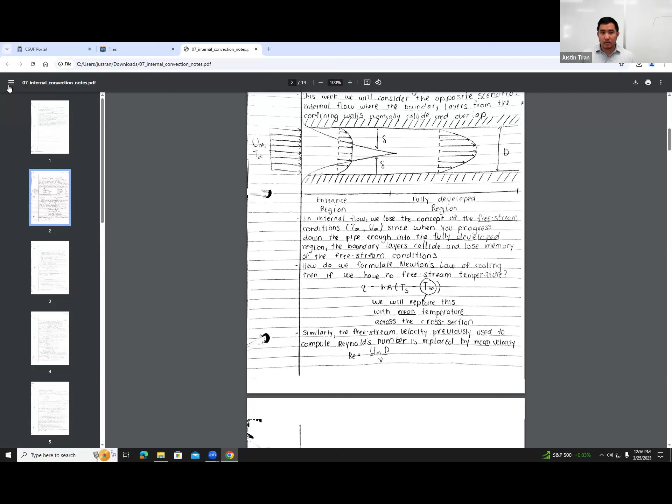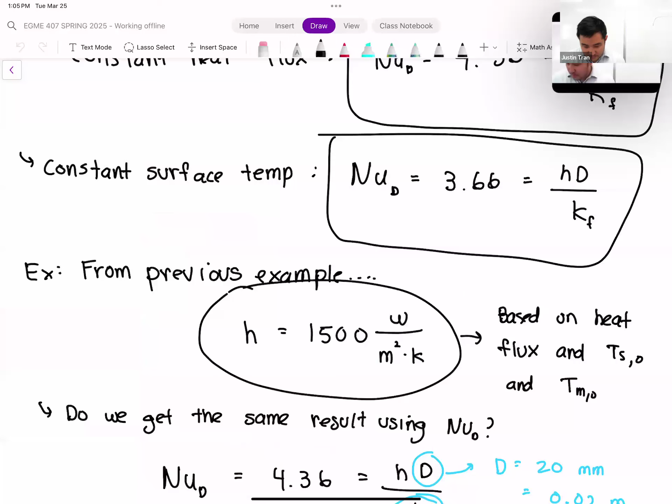Apologize, everybody. Get up soon. Right, we're in. All right, stop sharing here, let me come here. All right, we're in. Lecture's back on for today. Okay, so we'll see how stable this is. If someone notices the audio come back after, let me know, because this is not ideal. We're like 5 seconds behind. Okay, here we go. Okay, let's go ahead and get started.

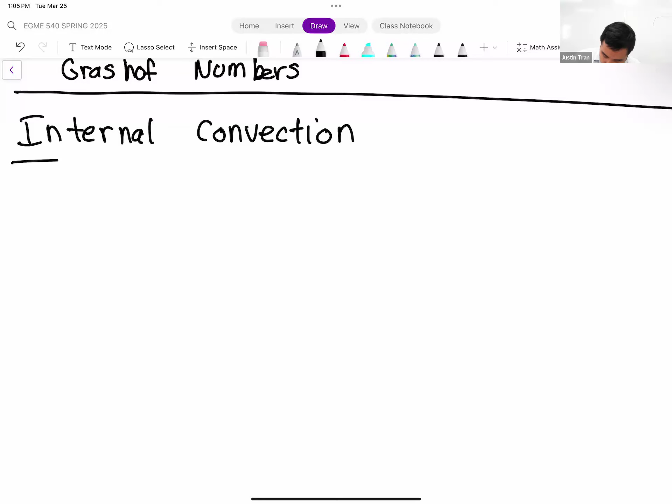Okay, so the topic for today is internal convection. So internal convection, we spent most of last week talking about this. This is basically just convection in a confined environment, so usually this is going to be flow in a pipe.

And so what we have here is we have a pipe. We have flow coming in here, right? And remember, anytime you have fluid flow and you have heat transfer going on, that's going to be convection, okay? Now the main thing that we're concerned about in these situations is the evolution of the mean temperature. One thing we talked about last week was that, because we have fluid in such a confined space, any kind of heat that gets transferred to the fluid or out of the fluid is going to affect the temperature of the fluid itself, right? That's kind of the main difference between this and external convection.

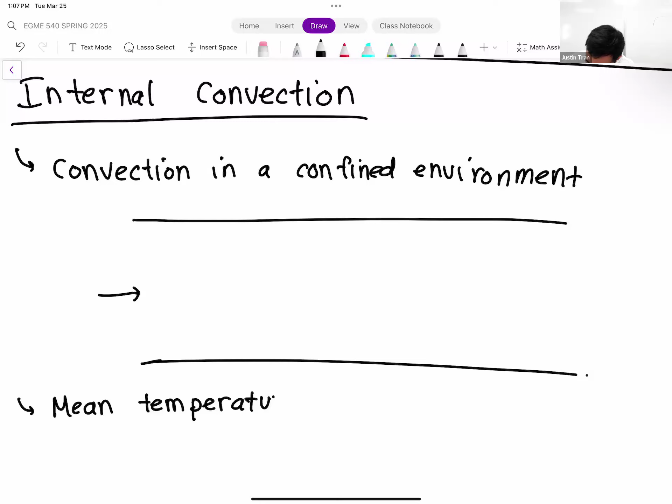And so we spent quite a bit of time talking last week about how do we find expressions for this mean temperature, okay? Remember we said there were two main scenarios that we can solve for this, right? In reality, solving for the mean temperature in the fluid is not something that's easy to do, just because there's a lot of things going on. But there are two kind of approximating situations where we can actually solve for this.

And so the first one, what we spent the most time talking about last week, was a constant wall flux, or I guess maybe a better way to say is constant heat flux from the wall. Right, so I'm not going to go over that one again, that was kind of what we spent the majority of the time on last time. But basically what we found in that situation was that our mean temperature was simply just going to be a linear function in X, right? So you can kind of go back in your notes and see what that expression looks like.

So the one we didn't really spend that much time on was situation 2, which is constant wall temperature. I think that's the situation that most people find a little bit more intuitive. In that situation, basically the temperature of your wall, what we say here is the wall temperature is TS, that is going to be constant all throughout the length of the pipe, okay? And so last time we did actually solve for the temperature distribution, so we solved for Tm of X, and what we found was that this was a decaying exponential.

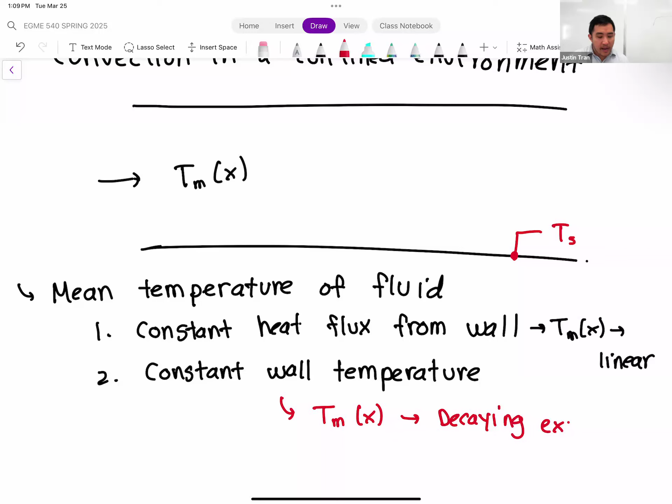Okay, so the relationship between these different wall conditions and how that affects the mean temperature, that's one point here. It's kind of a core concept for internal convection, so that's definitely one thing you want to go back and review about this section.

So what I want to start with today is, we did do an example with constant wall flux. Now I want to do an example where we have a constant wall temperature. And one question that we got that we discussed last week is, how do you know whether you should assume one condition or the other?

So I believe last time we did an example with constant wall flux. This time we're going to do an example where it's a bit more obvious, a constant wall temperature. As you kind of see more and more of these, and see the justification for what constitutes a constant wall flux versus constant wall temperature, you'll start to get some intuition for which one is more appropriate.

Okay, so for this example, let's actually do a biomedical example, something kind of from my own research. Let's consider blood flow in a large artery in your body.

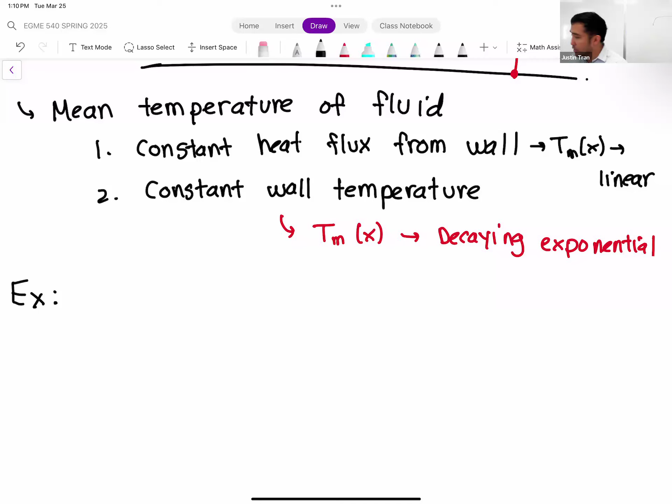Blood flow is really interesting because I think a lot of people associate blood flow with transporting oxygen and nutrients throughout your body, which yes, that is the main responsibility of the cardiovascular system. But your cardiovascular system is also responsible for regulating heat in your body. Because if you think about it, a human walking around has blood constantly flowing through every part of the body, and that blood can basically act as a heat exchanger. So a big part of your blood flow and blood vessels is to regulate heat in your body.

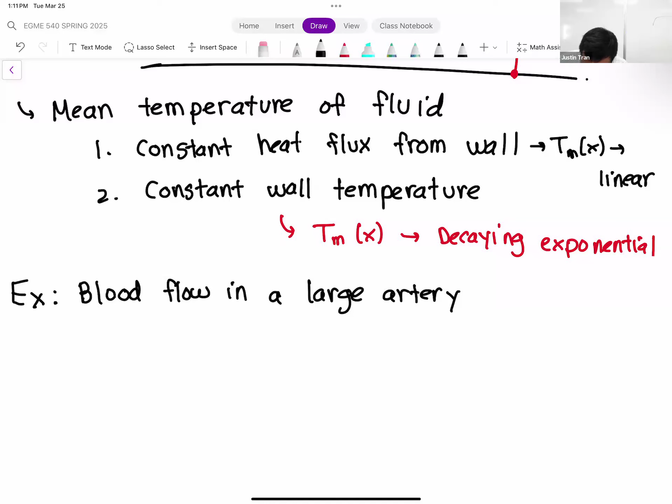Okay, so let's draw that out. Let's say we have a blood artery like this, with a diameter D. And all around this blood vessel, it's surrounded by tissue.

Tissue is kind of a general word we use in biomechanics. It's used for, I think probably the most obvious case, muscle tissue, because you have blood vessels going through all your muscles, but this could also be your internal organs. Most of the blood vessels in your body are surrounded by these tissues, and these tissues are often at some kind of temperature, which we'll call TT, or temperature of the tissue.

This would be a situation because your blood vessel here is surrounded by all this tissue that's all at the same temperature. This would be a situation where we can probably assume that the wall temperature is constant in this case.

So right off the bat, we know what assumption we're going to make in this case. All right, so let's look at more of the situation. We have blood coming in, and the blood is going to be at a different temperature than the tissue, which is typically the case. So what we want to do is we want to compute...

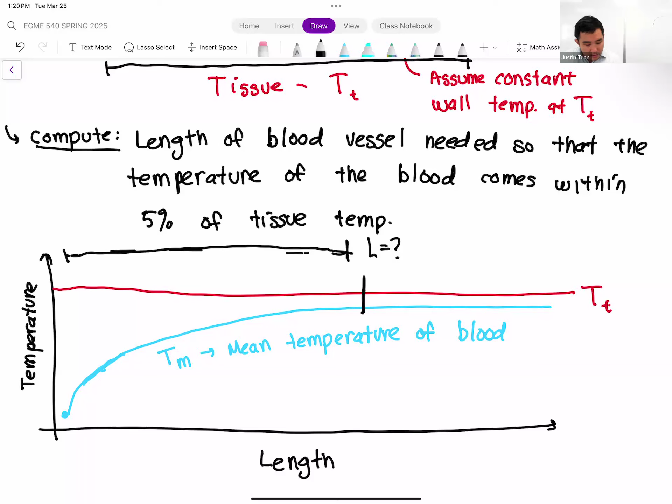To do this, we're going to need our mean temperature equation for constant wall temperature.

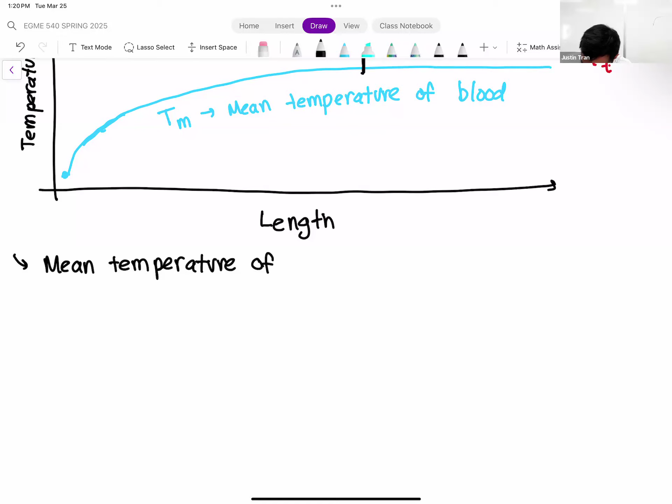So in this situation, we have Tm of x equal to Tm of 0 minus the temperature of the wall, which in this case is T sub T, multiplied by e to the minus pH over m dot Cp times x, plus T sub T. So for the case when we have internal convection with a constant wall temperature, this formula gives us the evolution of the mean temperature.

And basically, when we want to find out when Tm is within 5% of Tt, in order to solve this problem the first thing we need to do is fill in all of the properties here. So that's going to be step one: compute all of these.

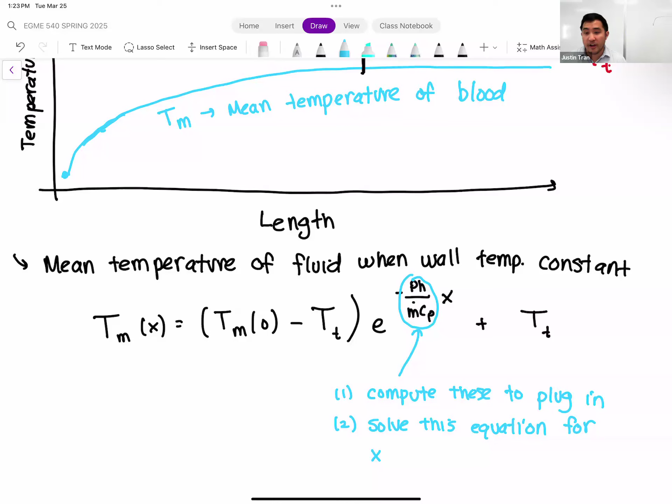Because X is going to tell us the length of vessel that's needed to get this within 5%. Actually, let's do that first. Let's take this equation and manipulate it a little bit so that it's easier to work with. Let's solve for X first, and then we'll plug everything in after that.

So what I'm going to do is subtract T sub T from both sides. On the left-hand side, we're going to have Tm of X minus T sub T. Then we're going to divide this whole thing by the initial condition, by that circled quantity there, so let's divide by Tm of 0 minus T sub T. And so all we're left with on the right-hand side is just the exponential term: e raised to the minus pH over m dot Cp times X.

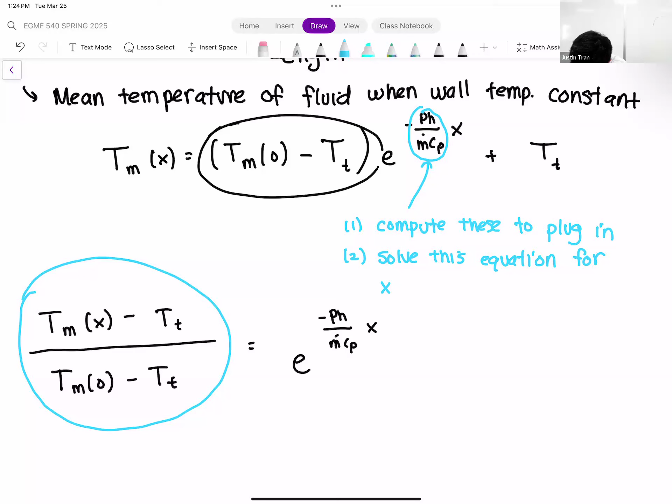The reason I manipulated it like this is because we want to solve for the point where the mean temperature of the fluid is within 5% of the wall temperature. What that basically means is that this quantity on the left-hand side, when Tm is within 5% of Tt, that entire quantity becomes basically 5%. Because on top there we're taking the difference between the mean temperature and the surface temperature at some location X, and in the denominator we're taking the difference between the mean temperature at the inlet minus the temperature at the wall. So when Tm of X becomes within 5% of Tt, this whole quantity becomes 0.05.

Okay, so what we have here is 0.05 is equal to E to the minus (pH over m dot Cp) times X. So now we have a much simpler expression here to solve for X, granted that we're able to compute everything in that exponent.

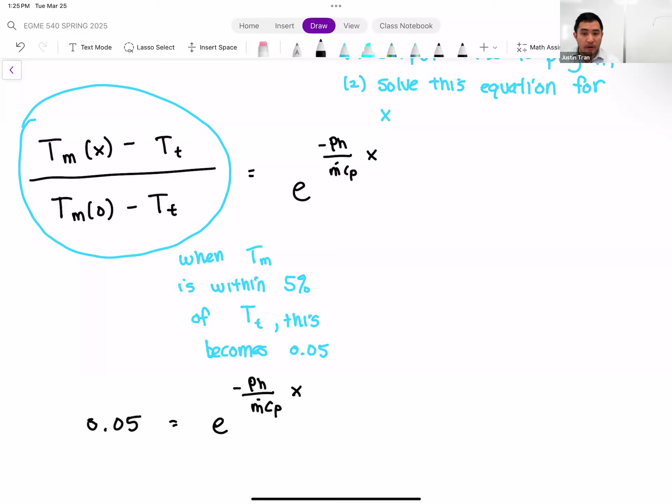So we need to have expressions for P, for H, for m dot, the mass flow rate, as well as the thermal capacity of the fluid Cp.

So if you want to put some numbers on this, let's say TT is 100, just to make these clear, and let's say that the fluid comes in at 0 degrees Celsius. Once this is within 5%, then TM has to be 95 in this case. So then we would not be equaling it to that 95 degrees Celsius, it's just a range.

So you're taking kind of the ratio between what the current temperature is compared to where it started.

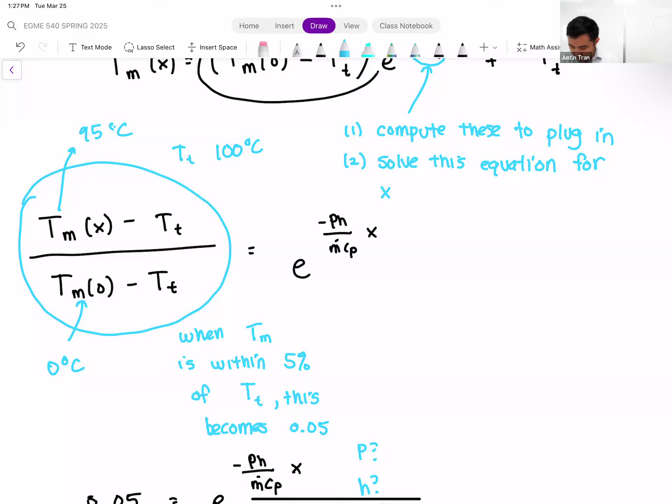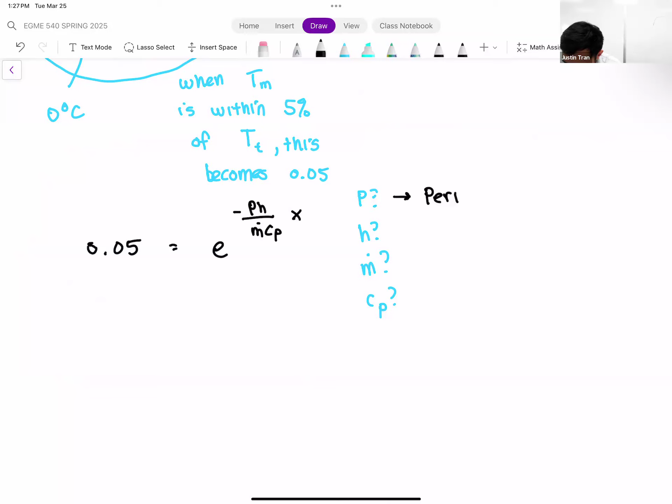So we have 4 quantities we need to look up here: P, H, M dot, and CP. P here, remember, is just the perimeter, and this can be computed based on the diameter, which we know. So perimeter is just equal to pi times d. So this one's good.

CP, remember, is a material property of the blood itself, so this one you can just look up in a table. This right here is a fluid property. Now, granted, you do need to know the temperature of the fluid itself, which we are going to assume. But for now, we can say that's a fluid property, something we can look up in a table, something that's known as well. So we're good to go on that.

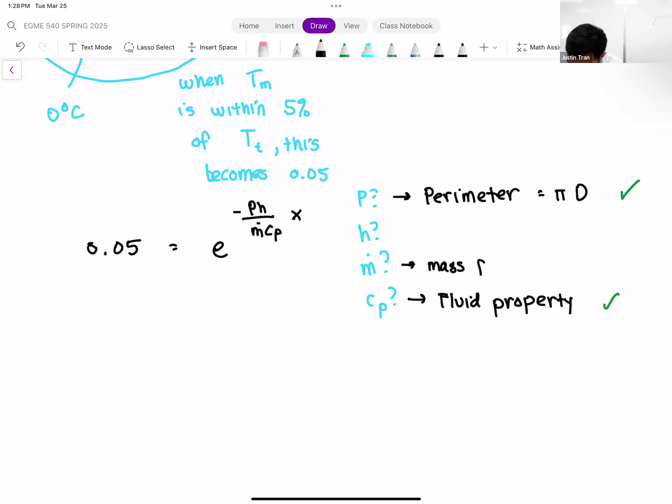M dot here is what's called the mass flow rate of the fluid.

So I'm doing this problem a little bit out of whack because of the Wi-Fi problems, but this is something that's normally going to be given to you as well. I will write that down in a second, but we'll say that that's given.

So all that leaves here is just the convection coefficient H. For this one, we're going to need to use our Nusselt correlations in order to compute its value, which is kind of the whole theme of this entire unit, just in general.

Okay, so let's go ahead and continue with the problem. Let me give you all the other information that I neglected to give you before. I apologize, I should have given you this information at the beginning with the problem, but I'm kind of out of whack of sorts.

So the given information: we are actually given all the properties of the fluid. We're given the density. So density for this fluid is 993 kilograms per meter cubed, and that's pretty accurate - blood is just about as dense as water.

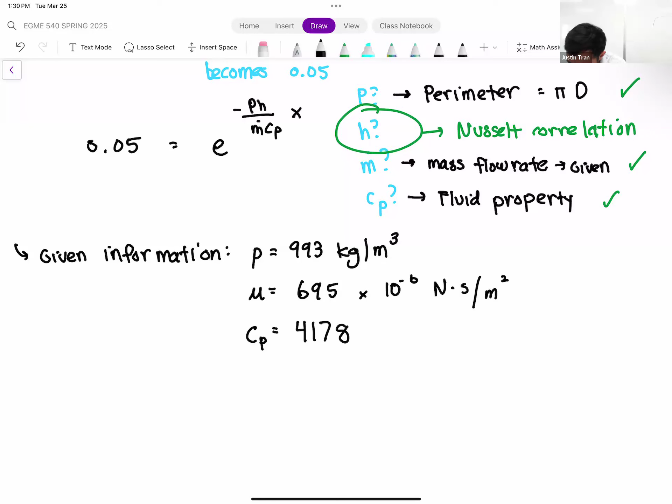Okay, we have thermal capacity, very similar to water as well: 4,178 joules per kilogram Kelvin.

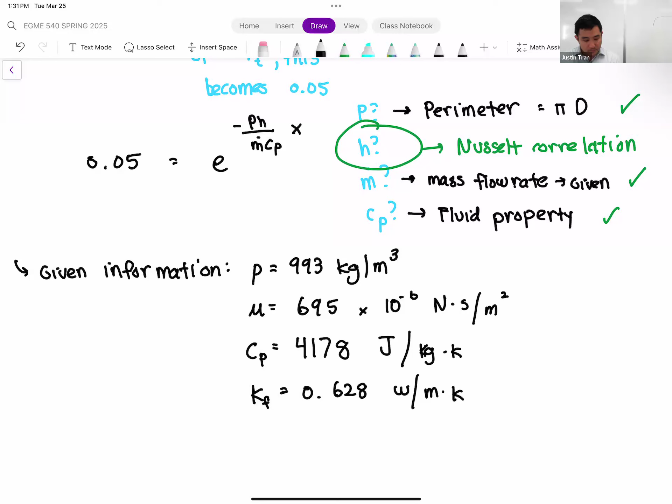We have the thermal conductivity of the fluid, so we're going to need this for the Nusselt number. This is 0.628 watts per meter Kelvin. And we also know the Prandtl number as well, so the Prandtl number for the blood is 4.62.

Normally you would look these properties up in a table based on the temperature of the fluid, but blood isn't something that's tabulated. So when you have a weird fluid like this, you just have to be given the properties, along with information about the vessel itself.

So we know the diameter. The diameter for our large artery in this case will be 3 millimeters.

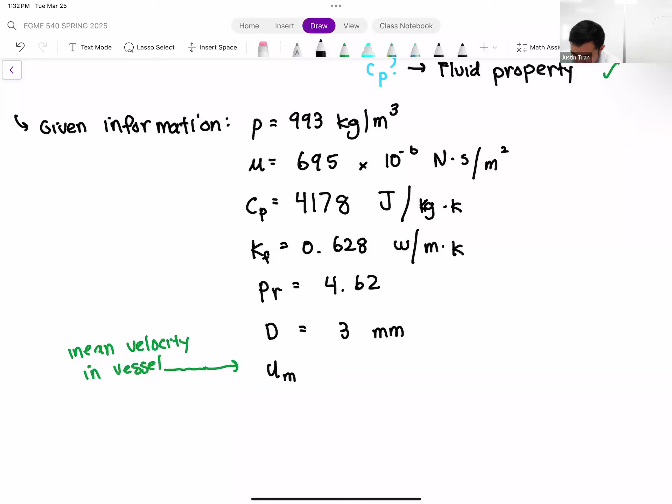We also know the mean velocity, right here. This is going to be the only kind of awkward one. This is the average velocity in that vessel. Our average velocity for the large artery is 130 millimeters per second.

So that was everything I should have given you at the beginning of the problem. You can see that CP, which is something we need for our equation, is given to us. Well, that was not what I wanted it to be. CP is not that cool, not cool enough to be rainbow.

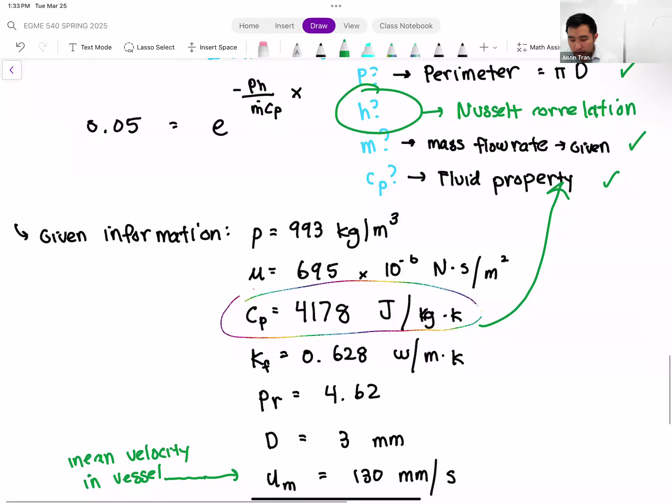Diameter is also given to us, so we can compute the perimeter. Now the mass flow rate is not directly given to us, but we can compute it based on our information here. Let's do that first.

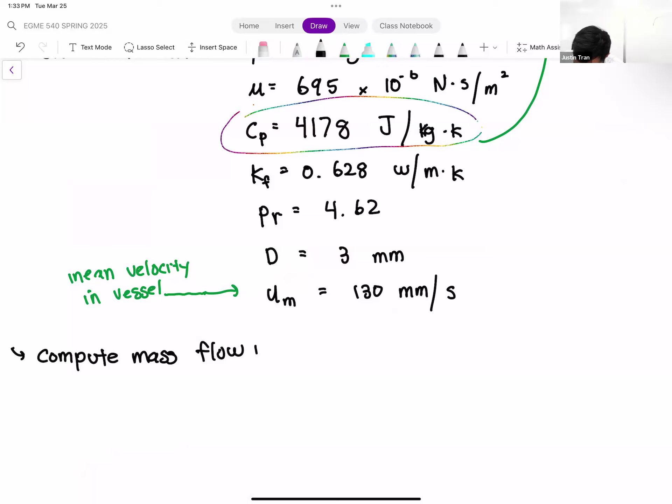I can't tell if the Wi-Fi is back up or if my wife paid AT&T a little extra money to get it to work better right now.

Let's compute the mass flow rate. A little review from fluid mechanics: mass flow rate is the rate at which mass is traveling through our blood vessel. One way we can compute it is we take our Q, capital Q, where Q is the volumetric flow rate.

Typically, volumetric flow rate is a volume per second, so in SI units that's meters cubed per second. Then we multiply that by the density rho, and density of course is kilogram per meter cubed. Density is obviously given to us; we already know what it is.

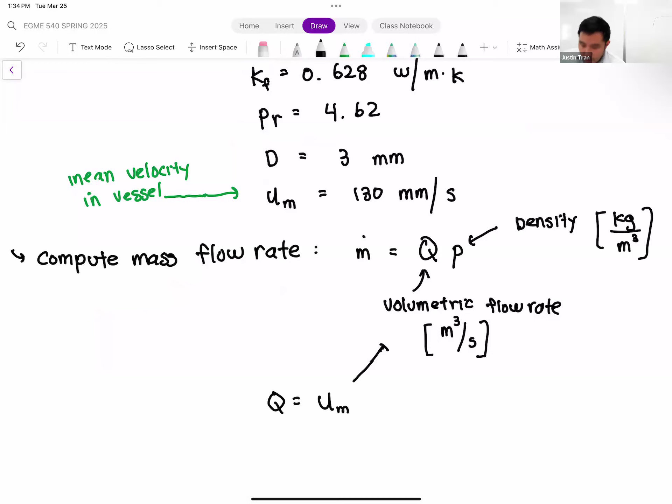Let's compute the volumetric flow rate. One way you can compute it from a mean velocity is you say big Q equals the mean velocity multiplied by the cross-sectional area of our pipe. Since we have a circular blood vessel, the cross-sectional area is pi times diameter squared over 4.

So several steps here to plug in based on the information we have, but let's put it all together. Our mass flow rate is equal to u_m times pi D squared over 4, multiplied by our density. I don't actually have that plugged in, but you can take this expression and plug in your numbers, because this expression for m dot is based on everything we're given.

Any questions on how we got this mass flow rate here? Thank you, I forgot. There it is. Any other questions on this?

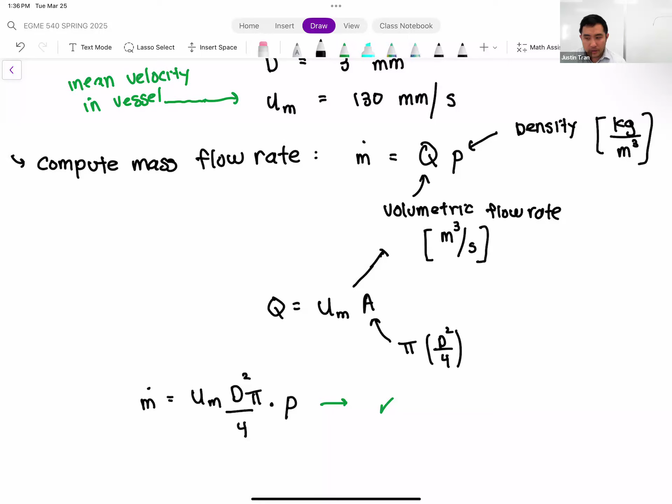So now that we have the mass flow rate, that's something we can compute. The other thing we need to compute here is the convection coefficient. So let's get on that.

Let's go through our usual convection problem solving methodology, but I'll speed run it a bit so we can move on to free convection. Whenever we need the convection coefficient, there's a 5-step process we follow. First, we need to know what our flow geometry is. Our flow geometry in this case is flow in a pipe, so we have internal convection.

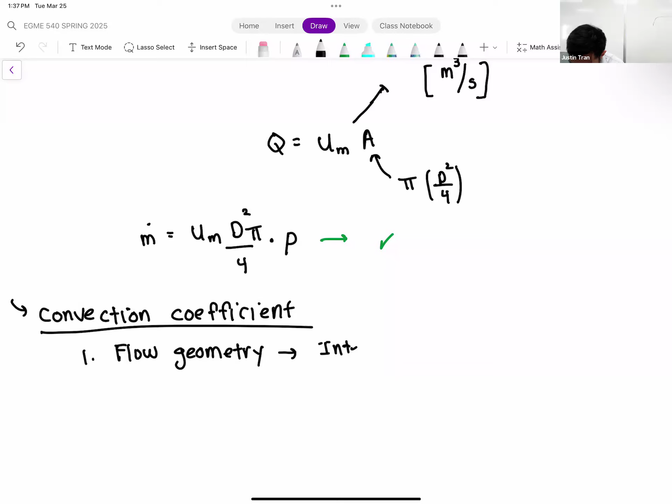Step two is to compute the fluid properties. Normally for the fluid properties you'd need to consult a calculator of some sort, and you'd need to compute the film temperature. Here it's already given to us, so we'll just say that this is given.

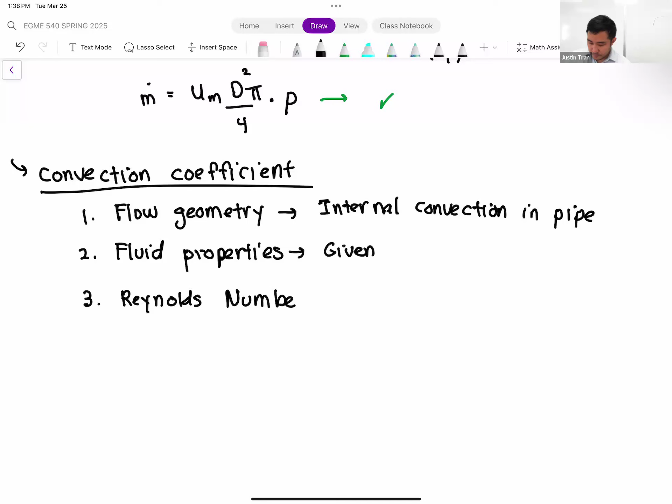Step 3 is we need to compute the Reynolds number, which tells us whether our flow is laminar or turbulent. For flow in a pipe, based on the information given to us, our Reynolds number is velocity times the diameter multiplied by the density, divided by the dynamic viscosity mu. That gives us a non-dimensional number, and when we plug everything in for this problem, what we get is 557.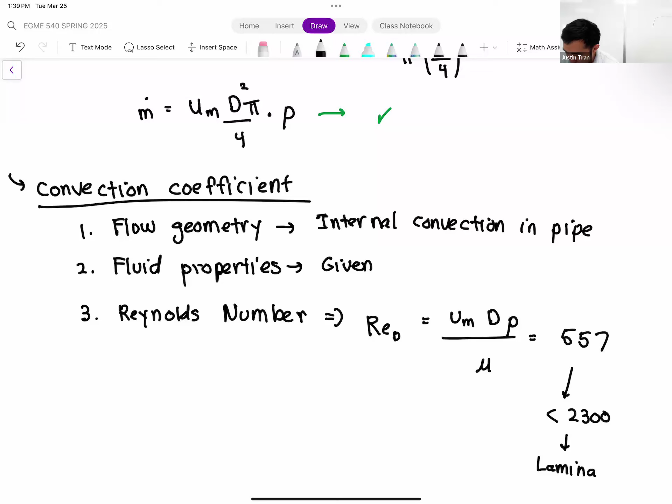Luckily for us, this is less than the critical number. Remember, the critical number for internal flow is 2300. Since this is less than 2300, that means our flow is laminar, which is great - laminar flow is fantastic.

Step 4. Now once we have all this information, we know the geometry, we know our flow is laminar, we know the fluid properties. We can select the correct Nusselt correlation.

This is one of those interesting cases, because in internal flow, if you have laminar flow, our Nusselt number is just a constant. For the case of constant surface temperature, our Nusselt number is 3.66. This is our Nusselt number for internal flow with constant surface temperature.

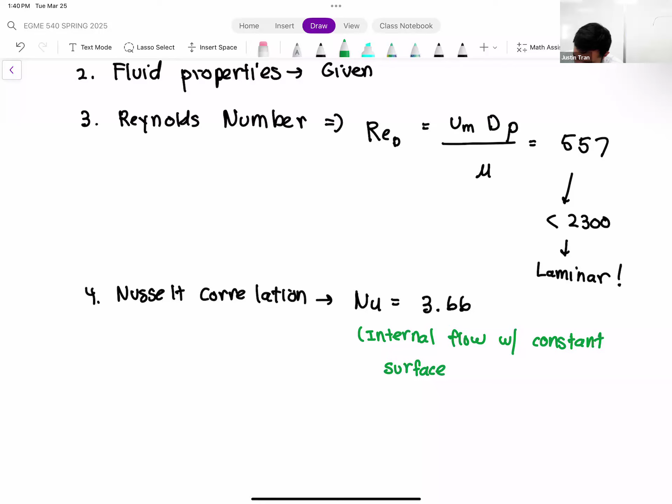That's great, so there's nothing really for us to plug in. I should say this is laminar internal flow, that's kind of an important part. This expression for constant Nusselt number is only viable for laminar flow.

Now that we know the Nusselt number, we can use this to compute the convection coefficient. That's step 5.

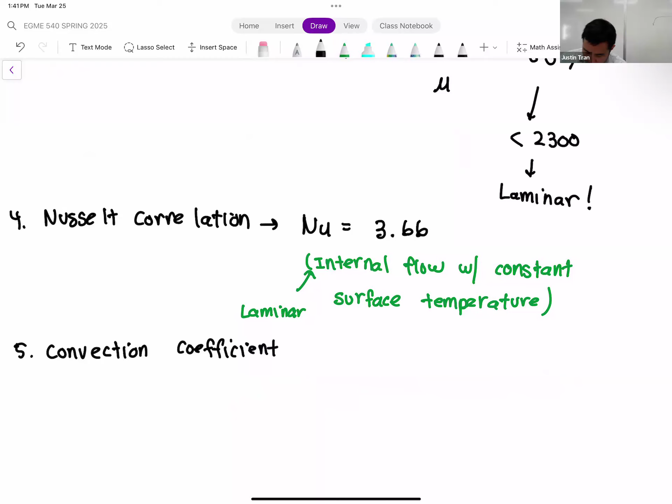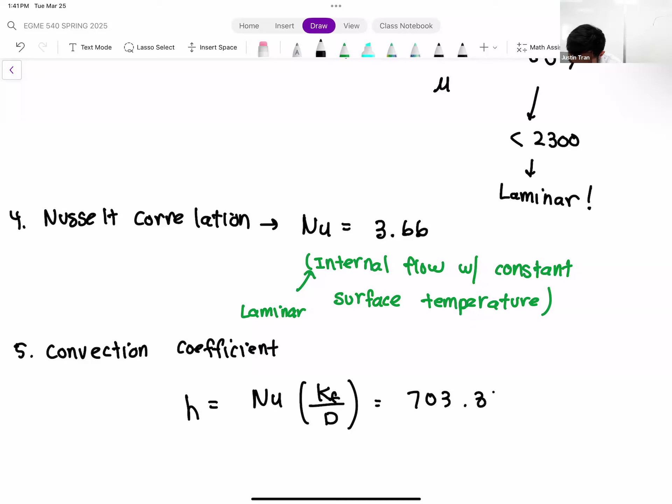Because we know that H is equal to our Nusselt number multiplied by the thermal conductivity of the fluid divided by the diameter. So let's plug everything in here. We know our thermal conductivity that was given to us, we know the diameter, we just found out what the Nusselt number is. And so in this case, our H is 703.36 watts per meter squared Kelvin.

I know that was kind of really fast here, but this 5-step process, make sure you know it because it's important for this section. Any questions on this here?

Good. Now that we have H, we have everything else that we need. We have the mass flow rate, we have the perimeter, we have everything. We can then plug all this in and solve for X.

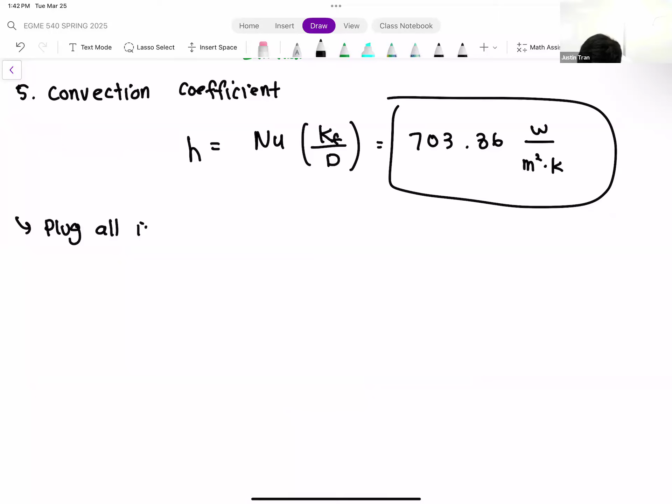So we have X is equal to minus the natural logarithm of 0.05 multiplied by rho times the diameter times CP, divided by 4 times the convection coefficient H. There was a little bit of simplification here, but we need to move on. After you plug in for the diameter and the mass flow rate, this is what you get. And what we get from this expression is 8.7 meters.

Which sounds like a lot, right? Because an average person is not 8.7 meters long. But if you think about it, a lot of your blood vessels are coiled up within your body a lot. It's like taking a rubber band or a string and wrapping it around your finger—you can do that maybe several hundreds of times, so you can have a lot of string compact into a small area. Your blood vessels are kind of the same way. I think someone measured it once—if you took every single blood vessel inside a person's body and laid them end to end, you could stretch across several hundreds of miles. That's just how many blood vessels are in a person's body. How someone found that out, I don't know—I'm not going to ask or find out, but that's the estimate. That is rho, density, yeah.

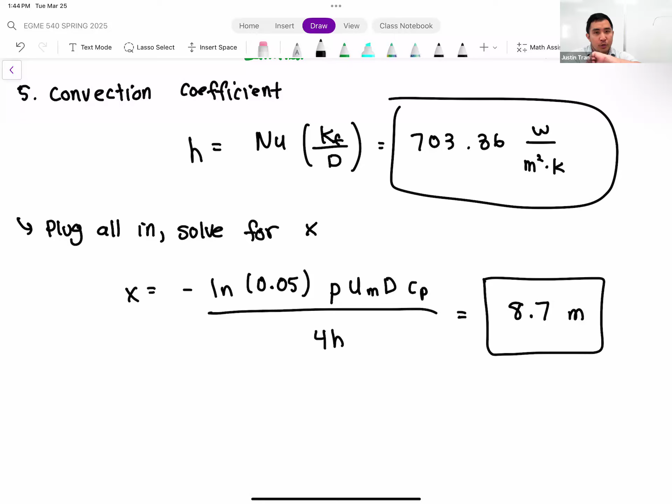Any questions on this example here? Okay, one final thing before we move on to free convection. Let's talk about turbulence, because everything we've talked about so far with internal convection has been laminar flow.

So it is possible to get turbulence in internal flow—I believe one of our previous examples had that as well. The unfortunate thing is that turbulence makes things extremely difficult to analyze. Without going into some really high level graduate stuff, that's the most we can say: turbulence makes things just really difficult.

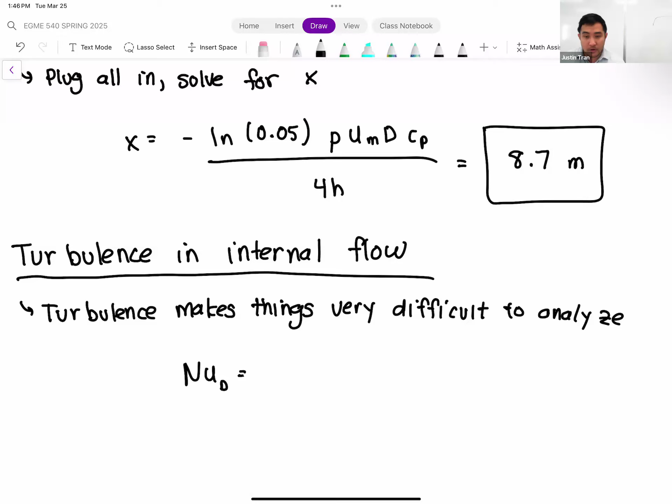So in this situation, your Nusselt correlation based on the diameter is going to be 0.023 times the Reynolds number based on the diameter raised to the 4/5 power, multiplied by the Prandtl number raised to the n.

So if you look at this correlation, it's very much almost exactly the same as our turbulent Nusselt correlation for flow over a flat plate, even right down to the coefficients.

Now the only difference here is in the value of n. So n here has two possible values: n is 0.4 if Ts is greater than Tm, and that's a situation where your fluid is being heated by the wall.

The other situation is that n is equal to 0.3 if Ts is less than Tm, and that's a situation where the wall is being heated by the fluid. So that's the only difference there.

So basically you would use this correlation when the Reynolds number based on the diameter—and that's kind of the key thing here with internal flow too—don't use the length of the pipe. For the Nusselt number and the Reynolds number, you want to use the diameter in these calculations.

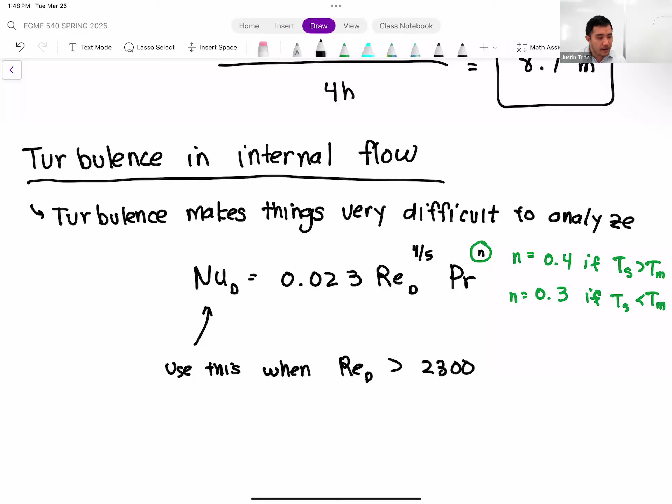Okay, all right, so that's everything with internal flow. I apologize, that did take longer than I thought because of the technical difficulties, so I think free convection is going to get shortchanged a little bit, but that's okay. Free convection is kind of a chill topic in a lot of ways.

Okay, so let's go ahead and move on to the next set of lecture notes, which again is called free convection.

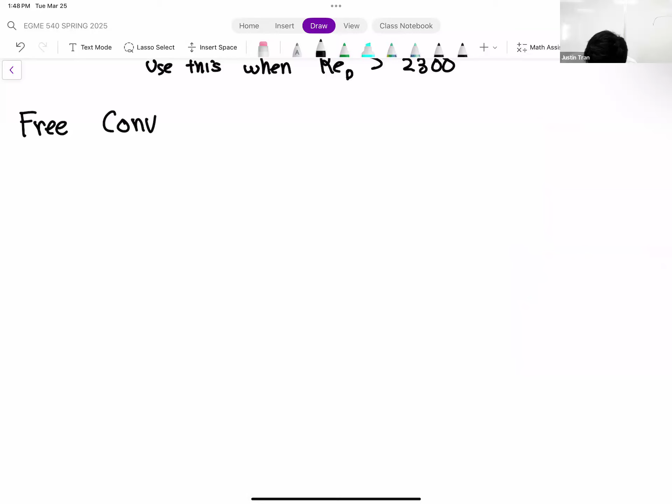Free convection is really cool. It's something that's like, wow, I didn't expect that to happen. But at the same time, it's also not super impactful in a lot of ways, and you'll kind of figure out what I mean by that in a second.

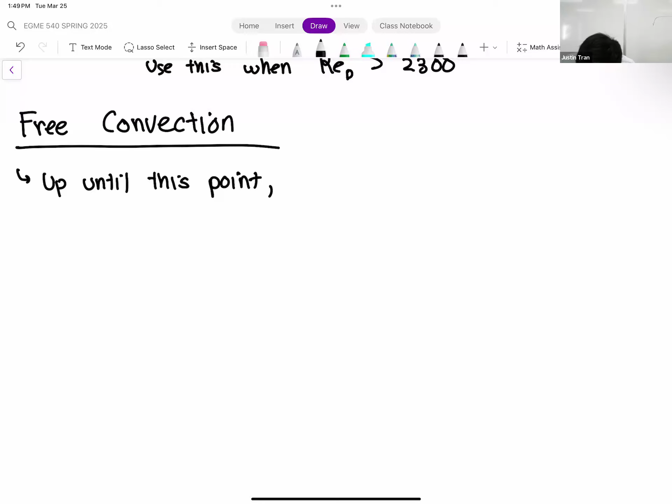Okay, let me start with this statement. Up until this point, we've been talking a lot about convection throughout this whole semester, and the assumption is that there's some kind of force driving the fluid flow. Another way to say that is all our convection up until this point has been what's called forced convection, meaning there's some external force driving our fluid to flow from point A to point B.

And so we've always just kind of assumed that the fluid has some kind of velocity. How it got that velocity was usually not of concern to us, but there's usually some kind of pressure difference or atmospheric forces that's driving our fluid.

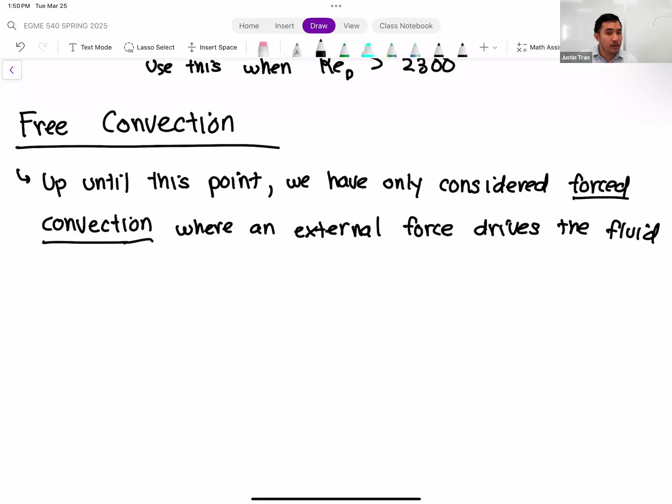And so I've kind of been telling you up until this point that if there's no motion, or if your fluid is completely still, then you don't have convection at all. But let's revisit that statement: is it possible to have convection heat transfer when there's no external forcing, or nothing that's forcing the fluid to move?

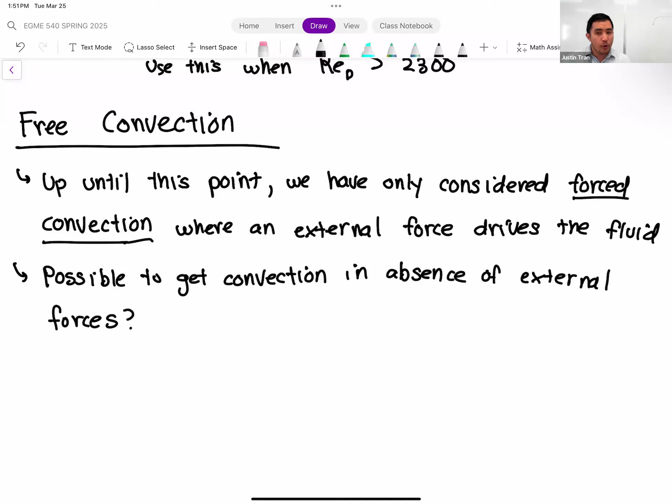So is it possible to get convection? You do need motion—that's kind of a requirement for convection, there has to be some kind of motion in the fluid, otherwise you just have pure conduction. But if there's nothing driving the flow, is it possible to get fluid flow in that case? And of course the answer is yes—I'm asking this question very rhetorically. But how can that be?

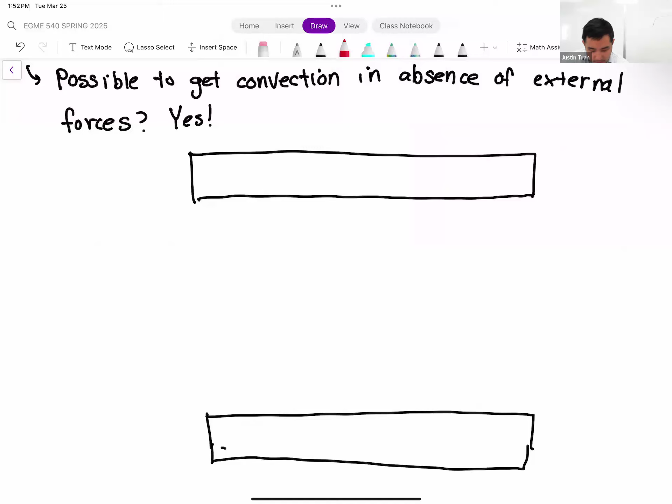So let me draw a picture to show you what that looks like. Let's say we have two plates, and we're going to make a sandwich out of them—one plate on top, another on the bottom. Just for the sake of argument, we'll say the plate on the bottom is hot, so we've provided some kind of heating element so that it heats up, and the top plate is cold. So we have an innate temperature difference, and in between we have some kind of fluid—it doesn't really matter what kind, we'll say it's water.

Okay, so what's going to happen in this situation? We know just based on our intuition here, assuming the water is at some ambient temperature, that the water in contact with the hot plate is going to get heated, right? So you're going to have heat transfer from the hot plate into the fluid.

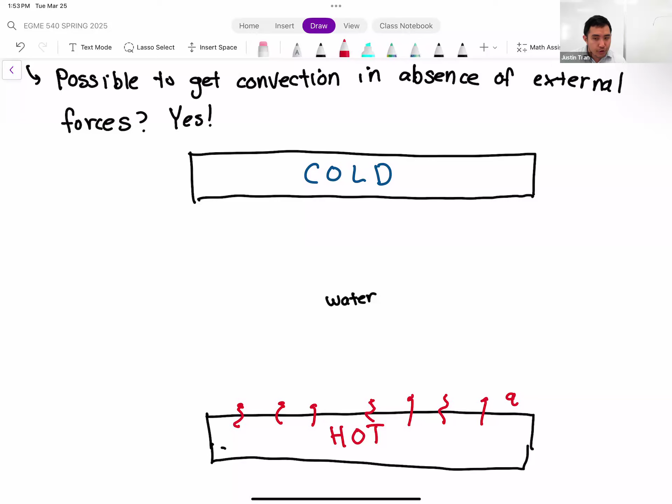So what's going to happen is that the fluid closer to the hot plate is going to warm up or heat. Whereas at the top plate, because that plate is cold, it's going to absorb heat.

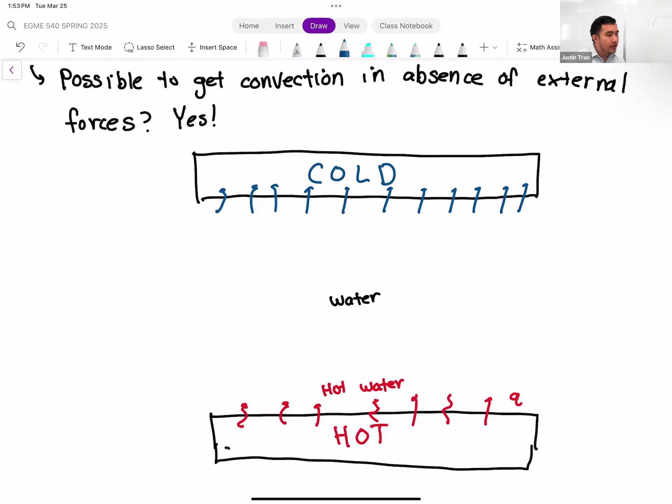And all of this is happening just by pure conduction, because we're assuming our water here has no motion to it. In other words, we have hot fluid at the bottom and cool fluid up top.

So as the water changes temperature, another thing we've learned over the past few weeks is that the material properties of a fluid depend very strongly on its temperature. So as the fluid heats up near the bottom, that's going to change some of its properties. Same thing at the top. The most important property we're going to talk about is its density.

So density, we use the symbol rho. What do we know about density and fluids and temperature? Generally, as a fluid heats up, its density goes down. And of course the opposite is true as well: as a fluid cools down, its density goes up.

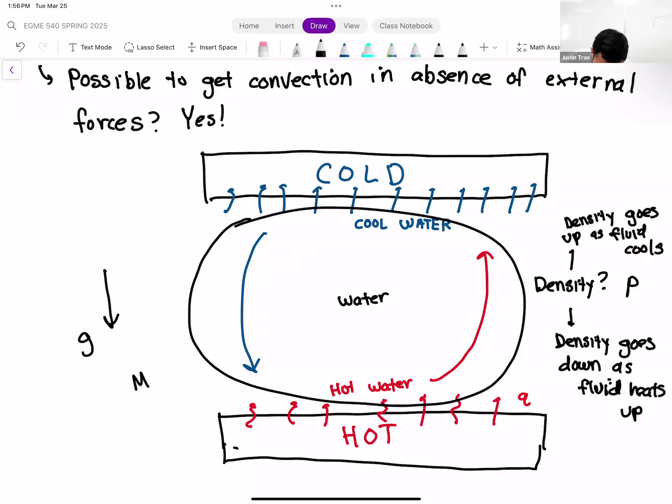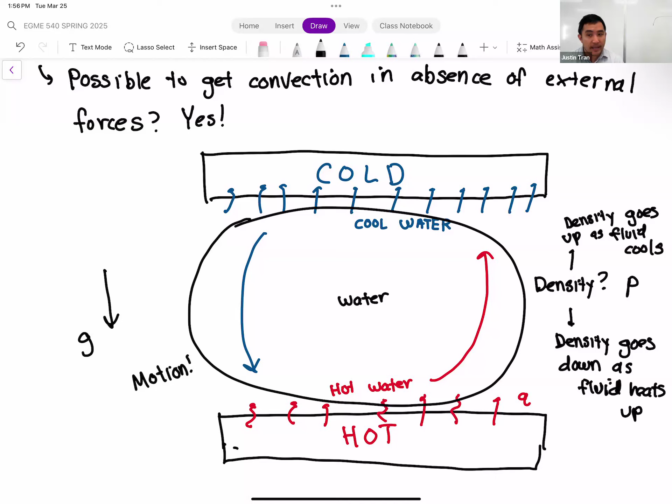So without any pressure difference, fan, or anything like that, we have relative motion in the fluid driven purely by density differences. This kind of motion, driven purely by differences in density as the fluid heats and cools, is called free convection. The exact forces driving this flow are buoyancy forces — if you remember that from hydrostatics. So buoyancy-driven fluid flow is called free convection in a thermal setting.

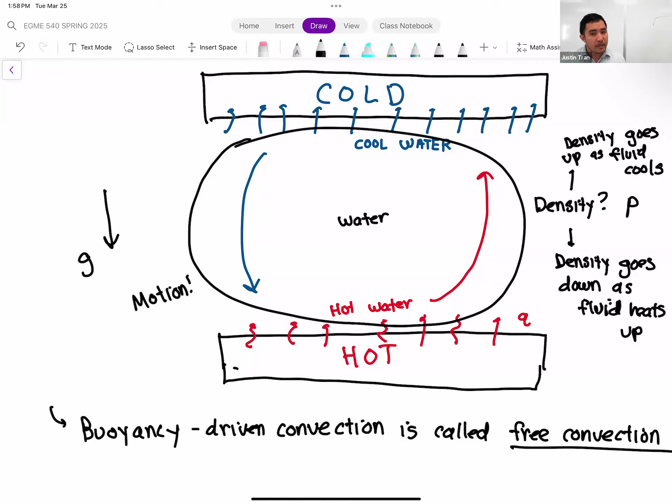Okay, so that's kind of what this whole unit is about. Now, is this significant? If you compare free convection to typical forced convection, free convection a lot of times is pretty negligible. A lot of times you can't get extreme enough density differences to really drive convection heat transfer. So I think this is a good topic to go over right before spring break, since we're all looking forward to it.

Heat exchangers is the more important topic, but there are situations where free convection can provide a big difference, usually in cases with a very large temperature difference between the solid and the fluid. So in most situations, unless the problem explicitly tells you to consider free convection, you can often ignore it. But for the times you can't ignore it, it's one of those really, really cool things.

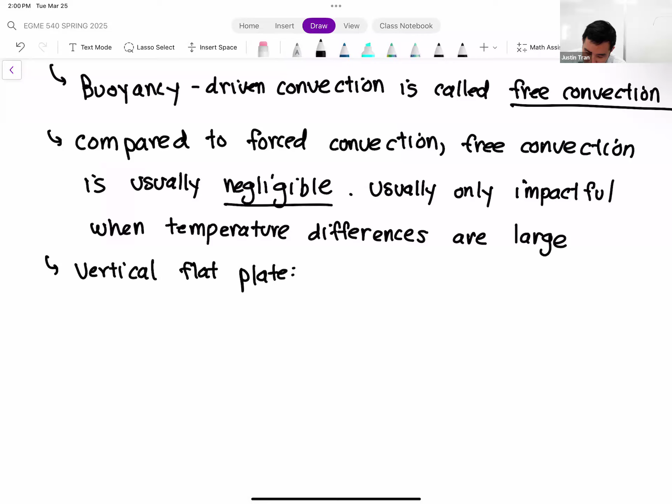So you have a flat plate, standing up at this time. Let's say the flat plate is at some temperature Ts, and we'll say the fluid outside, or far away, has some temperature T infinity. This T infinity is the ambient fluid temperature.

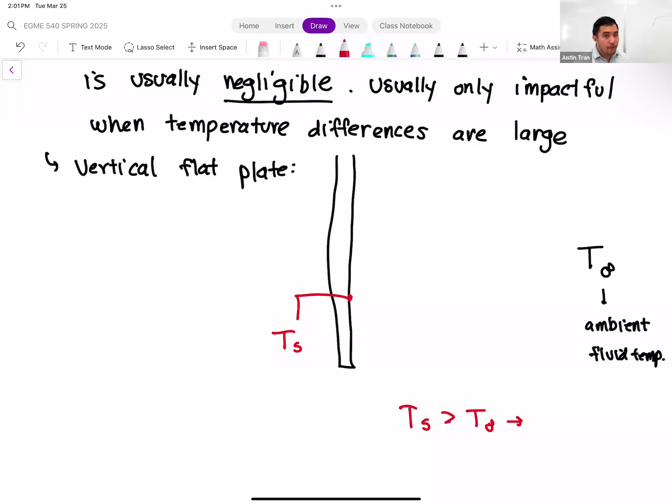And so if Ts is greater than T infinity, this is going to cause the fluid near the plate to heat up and get less dense.

Okay, and if they become less dense, that means they're going to rise, right? So you're going to have an upward fluid flow near the plate.

And so what's going to happen in that situation is that you have a boundary layer that's going to form here. And then inside the boundary layer, you have a fluid velocity like this. This kind of parabola that I drew here is kind of the upward motion of the fluid due to the density differences.

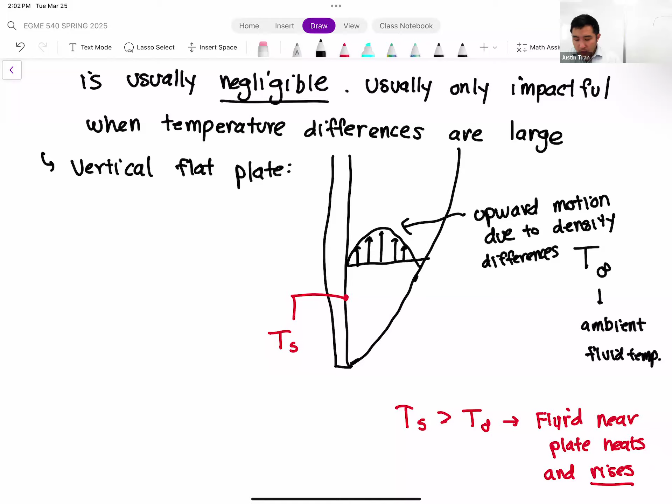Okay, so that's the situation we're going to focus on for now. And just like we've typically done in the last two weeks, the main thing we're interested in solving for in these situations is the convection coefficient.

So we are once again going to compute Nusselt numbers, and from the Nusselt number, based on the properties of the fluid, we're going to compute the convection coefficient. Same as we've been doing for the last few weeks. It's just that because the nature of this flow is different, since it's density driven as opposed to pressure driven or things like that, it's going to change our process a little bit, but the same general process is going to occur.

Any questions on this so far, free convection? Okay, so I think we have just enough time to introduce the process today, and then we'll really get into it and do some examples on Thursday.

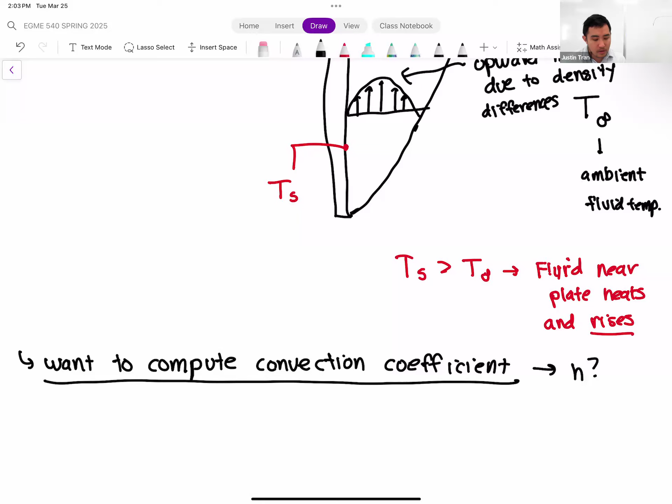So how are we going to compute the convection coefficient in these cases? Because the driving force in these situations is buoyancy. Oh, question, yes.

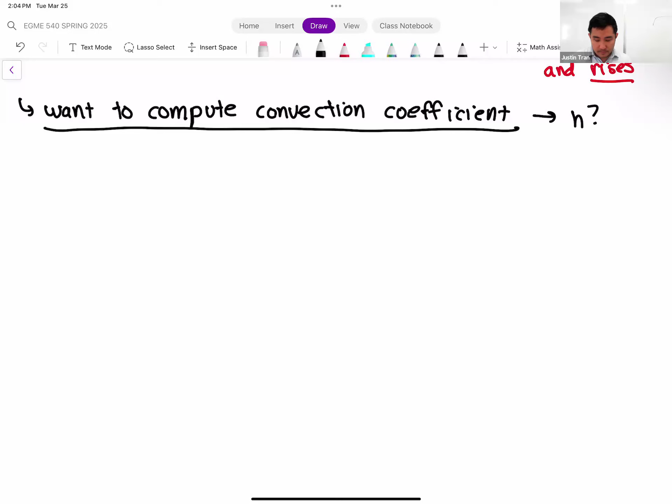Yeah, of course, there's variations to this. Based on the temperature difference between the fluid and the solid, you're going to have more flow if there's a larger temperature difference. So there's a difference between a pot that's just starting to boil versus one that's really boiling. So yeah, there are differences. And I think it gets really interesting with big differences when you have phase change. With boiling particularly, you have bubble formation, which changes things a lot too. We're not going to get into that here because bubbles make things really complicated. But what you're going to see is that what we compute does actually depend on that temperature difference.

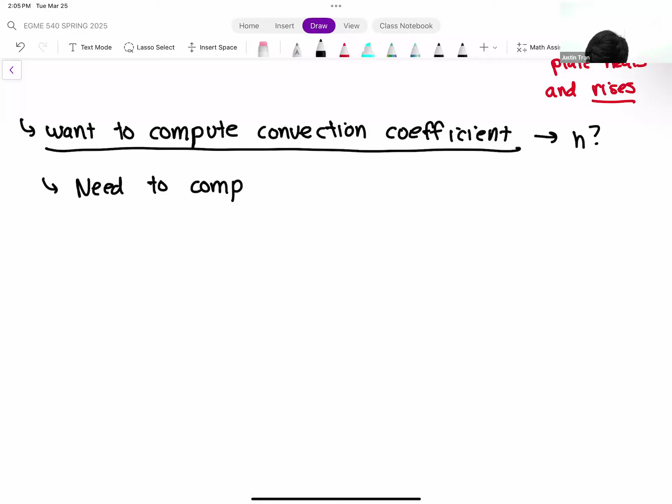Okay, so how are we going to compute our convection coefficients in this case? Just like before, we are going to compute the Nusselt number. And in the past, we know that our Nusselt number is some function of the Reynolds number and the Prandtl number. So those are usually the two main non-dimensional numbers we have to compute in order to compute the Nusselt number.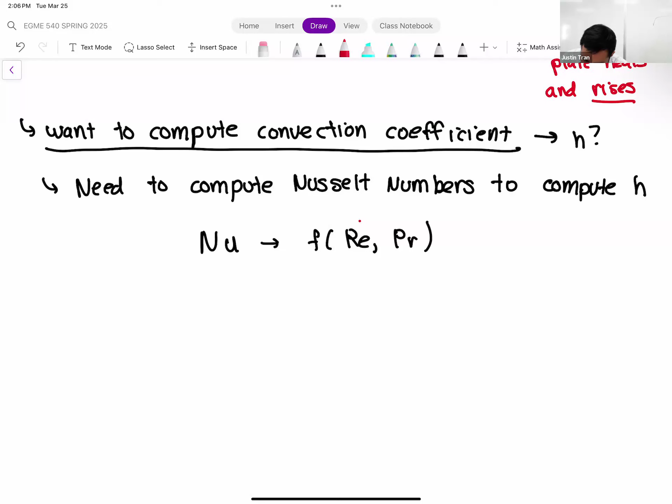But the problem with this is that the Reynolds number is really a number that's based on forced convection, right? In order to compute the Reynolds number, we need to know the fluid velocity. And with free convection, we don't know what the velocity is. We usually just know what the temperature difference is. So the Reynolds number is only really appropriate when you have forced convection.

We've kind of taken it for granted up until this point, just because the fluid velocity was pretty much always given to you, except for that one example. We've usually almost never had an issue computing the Reynolds number. With free convection, we are going to have an issue computing the Reynolds number, just because there's no way to do it. So we need an alternative to the Reynolds number that we're going to use in free convection.

Right, so it's going to change our coefficients a little bit. It's going to change our Nusselt number, but luckily there's actually an alternative to the Reynolds number for this exact situation. It's just credited to a different scientist, and the number we're going to use instead is called the Grashof number. So the Grashof number, Gr, stands for Grashof number. I think it was German. Not sure.

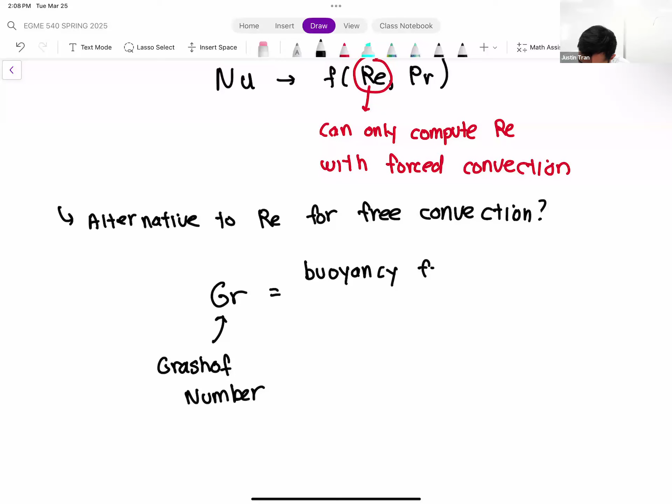Okay, so the Grashof number, well, let's talk about what it represents first. So the Grashof number represents a ratio of buoyancy forces over viscous forces. If you remember, the Reynolds number was a ratio between inertial forces and viscous forces.

Right, so the Grashof number is going to basically play the same role for us in free convection. So let's look at the expression for the Grashof number. Up top, we need some kind of expression for the buoyancy forces.

Is this the same Grashof as 4-bar linkages? I'm not sure, it might be. They're very different fields of study. But then you have people like Newton and Euler that are in lots of different things, so it might be the same person. I'm not sure.

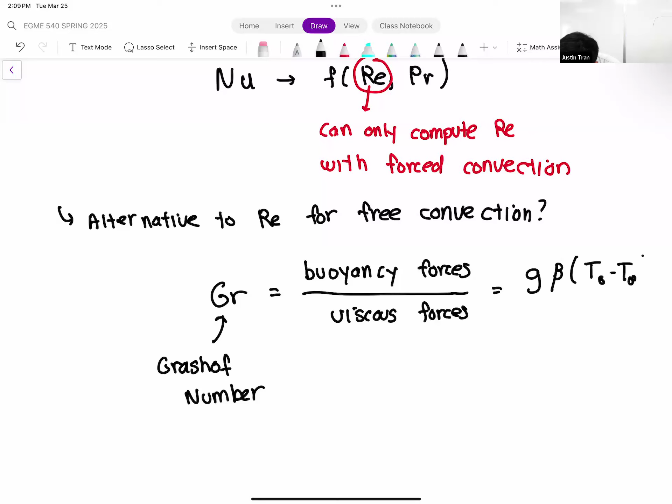So the Grashof number is G, which is gravity, times beta, multiplied by T of the surface minus T infinity, multiplied by the length of our plate cubed, or some kind of characteristic length. And then this is all divided by the viscosity squared.

Okay, so everything in this expression we've seen before. Well, gravity we haven't seen in a while, but G here stands for gravity. In SI units, that's simply 9.8 meters per second squared. The only other thing we don't know here is the beta. This beta is called the volumetric thermal expansion coefficient.

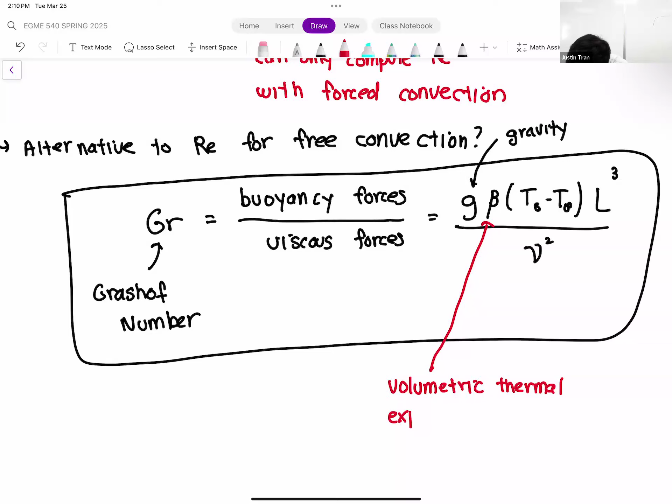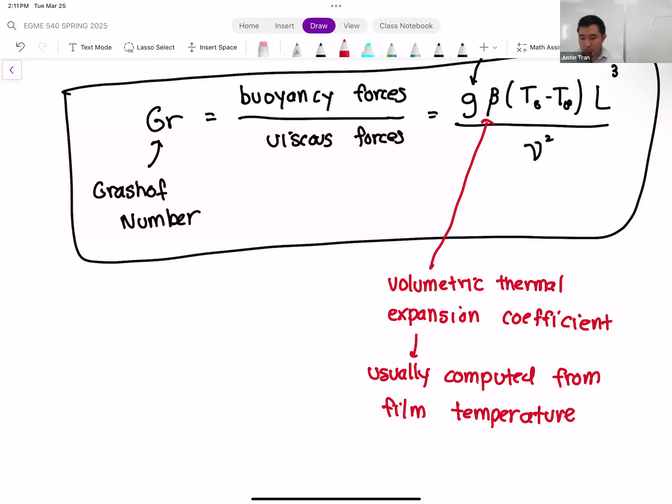We will talk about how to compute that later, but typically you compute this as a function of the film temperature. Basically, this is a measure of how much the fluid is going to expand based on its heating. As a fluid heats up, we know its density is going to go down, but different fluids have different rates in terms of how their density changes with temperature, and that coefficient expresses that fact.

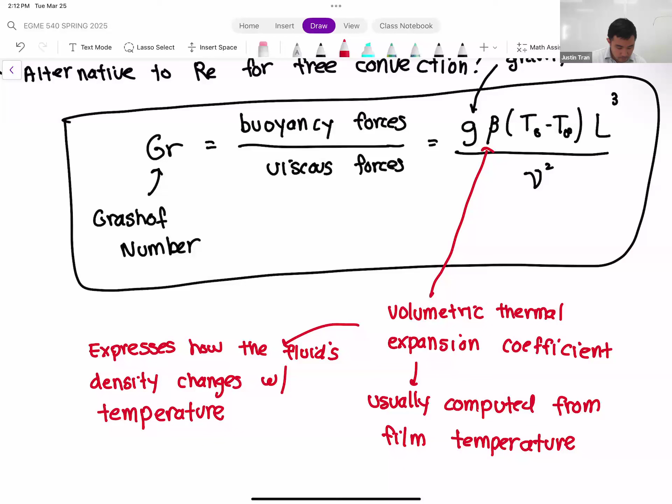Okay, so now that we have this Grashof number, we can use it to compute the Nusselt number. So instead of relying on both the Reynolds number and the Prandtl number, now we can compute the Nusselt number from the Grashof number and the Prandtl number.

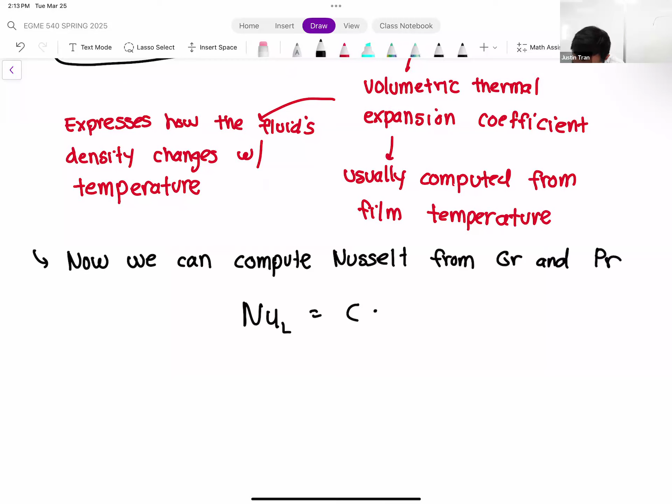This will be the last thing I leave you with today: the Nusselt number in free convection, based on the length scale of the plate, is equal to C, which is some coefficient, multiplied by the product of the Grashof number and the Prandtl number raised to the n power. So that's our generic expression.

It turns out that the relationship between Nusselt number and Grashof number has the same kind of exponent as the Prandtl number, and this splits into two cases. In the case of laminar flow, our Nusselt number based on the length of the plate is equal to 0.59 multiplied by the product of Grashof number and Prandtl number raised to the 1/4 power.

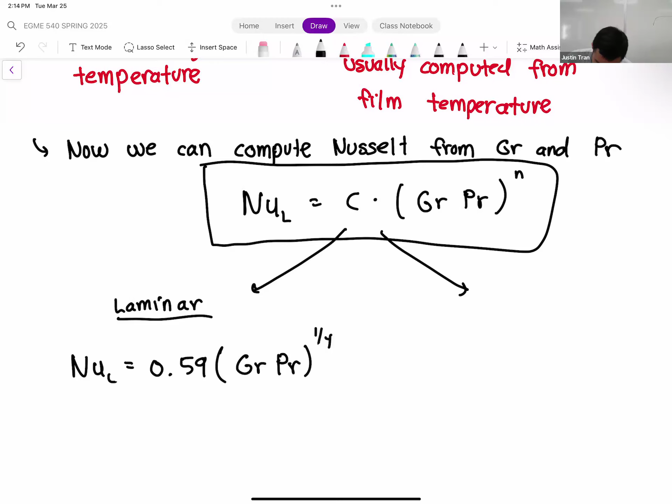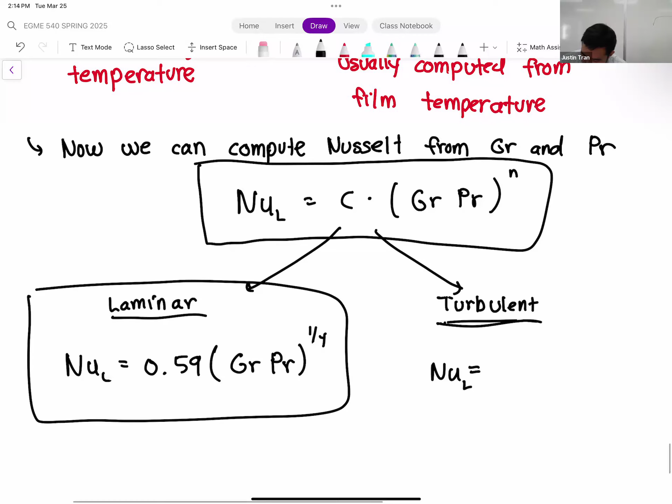And then for turbulent flow, we have the following relationship: Nusselt number based on the length of the plate is equal to 0.1 multiplied by the product of Grashof number and Prandtl number raised to the 1/3 power.

And when does turbulence occur? This will be the last thing. Turbulence occurs when the product of the Grashof number and the Prandtl number is greater than 10 to the 9th power, so actually very, very large. But what you're going to see is that our numbers here are going to be quite large.